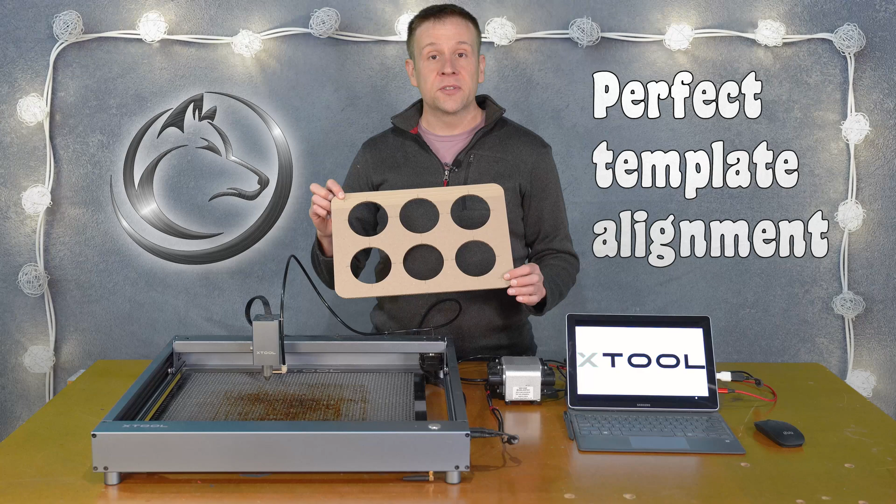I'm your host Greg, and in this episode I'm going to be making this template with 2 mini alignment crosshairs to reuse this template in future use. I'll show you how to make this template and how to align it to your workspace in your laser machine. Stay tuned to find out how.

For this project, to make this template, I'll need the following materials. Starting with the obvious and basic one is a piece of cardboard or plywood. I prefer cardboard because I'm not sure how many times I'll need to use this template in the future.

The last items are some type of measuring device if you're working on your own template. For mine, I'm making templates for these wooden cutoffs from a tree branch used as finisher medals for a local event. I have those sized to fit through here, but your project material might be sized slightly different. The last thing I'll need is a pair of safety glasses for this project.

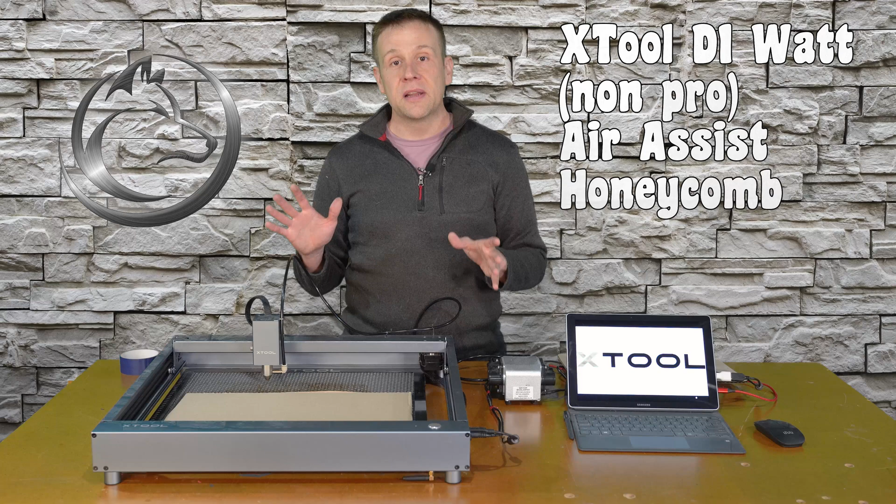The machine and tooling I'm using is the Xtool D1 10-watt laser machine. This is the non-pro machine, so it does not have limit switches, but with the software updates for the machine and in LightBurn, it does have a homing sequence, and we will need to use that during this project.

The other thing I have is the Air Assist Kit, to burn cleanly and deeply through this cardboard. The last item I'm using is this honeycomb. It is magnetic and has a backer board sheet metal behind it, so any stray laser beams going through the project material and honeycomb won't mark up my table.

There's just a few steps to make this template that we can reuse and realign for future use. Join me as I go into LightBurn and design out this simple template.

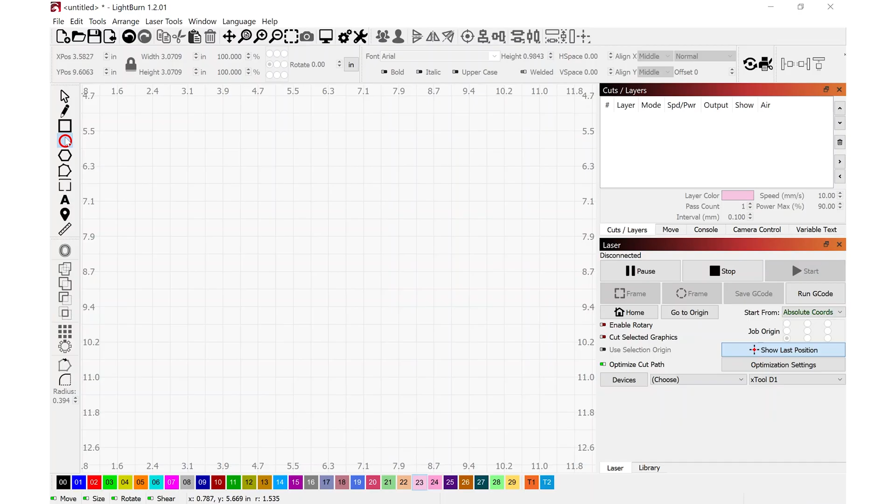I'm going to select the circle command and select layer 9, which is something that will show up much easier. Hold the shift key to make it stay a perfect circle. For my medallions, I need a diameter of 3.2 inches. If you're following along at home on your own project, you might need a different diameter.

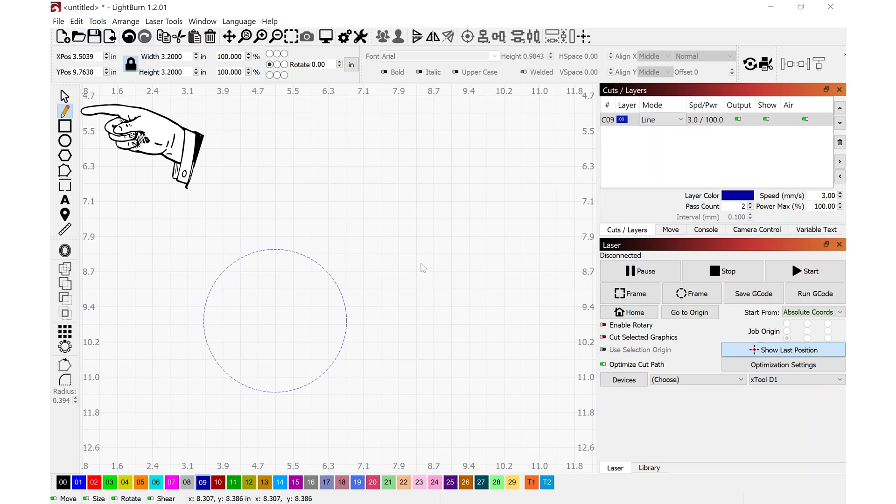Select the pen tool and draw a crosshairs vertically through the circle. This gives me an idea of the sizing, and I'm holding down shift so that this line will go in 45-degree increments. I'm going to pull this off to the side and select layer 10.

I'm going to Control-C to copy, Control-V to paste that. I'm going to grab that, move it back where you can see it, and while that's still selected, rotate it 90 degrees. Grabbing somewhere around the middle here, I'm going to move this around till I think it's somewhere in the center to make this crosshairs.

You'll see that my mouse pointer changes between a cursor and a smaller crosshair. That means this is centered up. There, this looks like it's centered up.

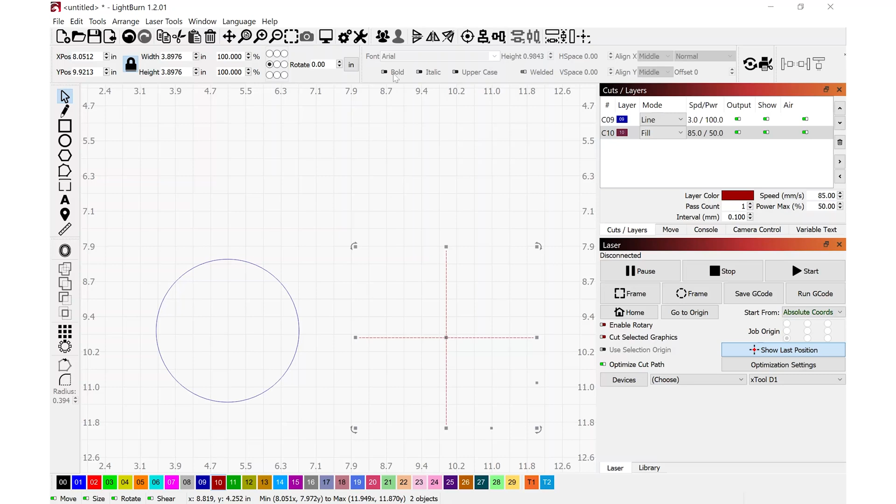With the horizontal and vertical crosshairs selected, I go up to the top and do group select. That will form this as one group, and I'm going to drag this over back to the center again until my cursor turns into a crosshair. Now I know that the crosshair I just drew is perfectly aligned to the center of the circle.

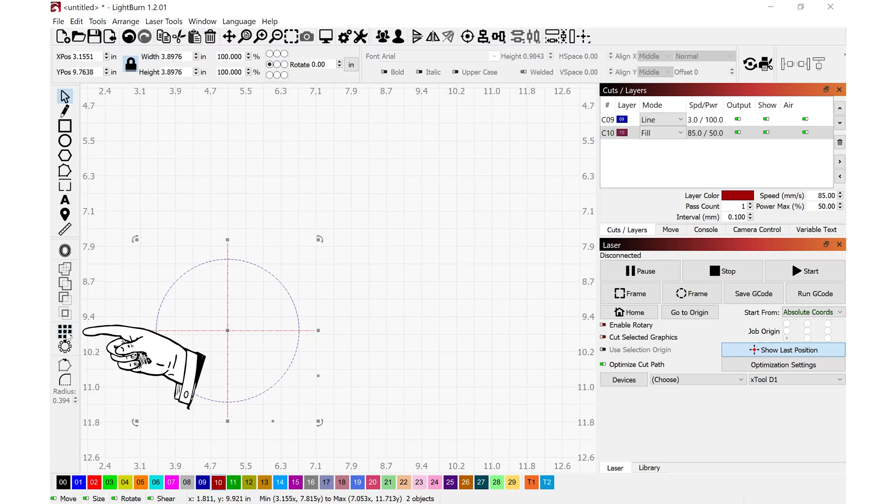Now selecting everything, I'm going to go over to this icon here, create an array of the selected objects. This is the easiest way to duplicate and make a neat and orderly pattern for our template. The X columns, I'd like to make that 3 wide and 2 rows tall, and in between, I'd like the spacing to be 1/4 inch for both X and Y.

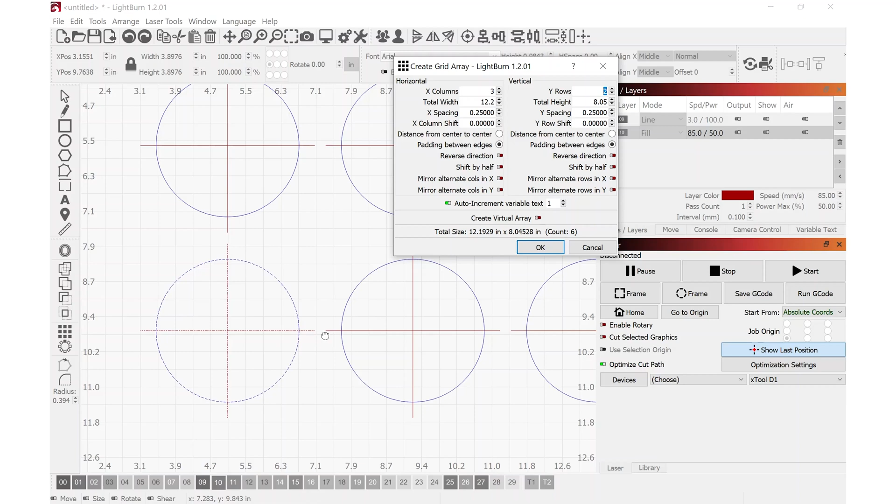Now it's setting that spacing off of the very furthest point of each object. In this case, it's the very tips of the crosshairs that we drew. I like the way this looks. Let me zoom back.

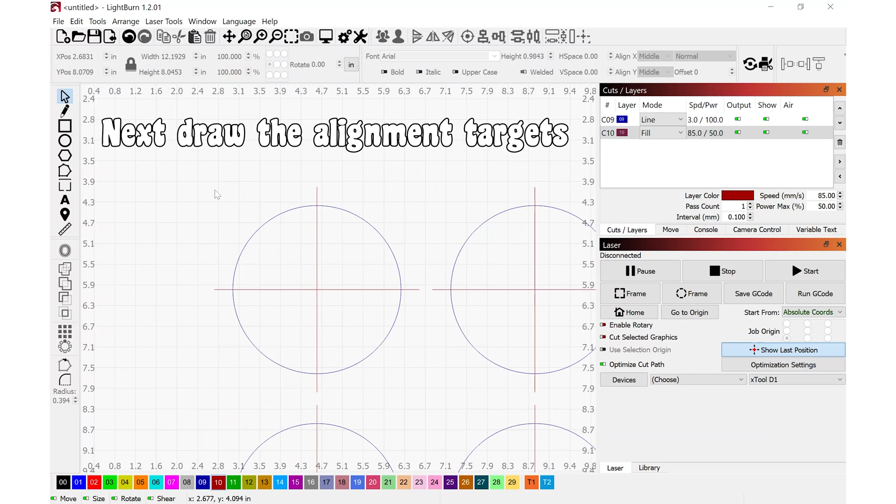Holding the space bar, I'm going to pan around on the screen. I'm going to zoom in and select everything, and move this a little closer to the center of the work area. Next up, I'll zoom in by one of the corners here, select the pen tool once again, and we're going to draw these smaller crosshairs.

And the smaller crosshair, I'd like to make that a half inch long. I'll Control C to copy and Control V to paste that while it's still selected, rotate 90 degrees, grab the middle of this and move that up until it turns into a crosshairs. Again, I'll select both pieces and group those together.

And with that selected, I can copy and paste that. And I'm going to grab this one. Typically, we put these alignment crosshairs in opposite corners.

The further away these crosshairs are from one another, the better the alignment will turn out. For example, if I put this other crosshairs right here, any slight misalignment I have here, the further I move away from that, it will be amplified. So a small error over here will be a very large error over here. Now if I have the crosshair alignment all the way to the opposite end, any small error over here will be even less in the middle.

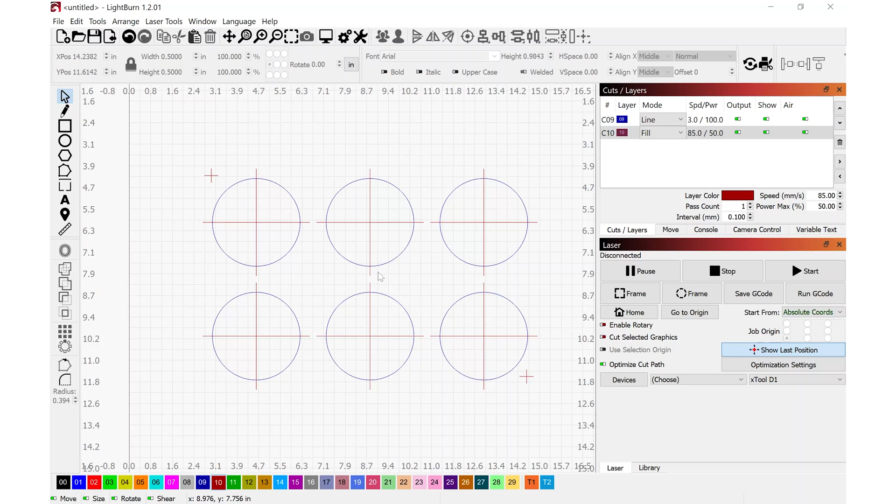And for the last step, I'm going to draw a box. I'm going to use a different layer for this one, and I'm going to draw something like that. And I'm going to hit the escape key twice to go back to my cursor. And with the box highlighted, I'm going to drag that around until I'm about in the center.

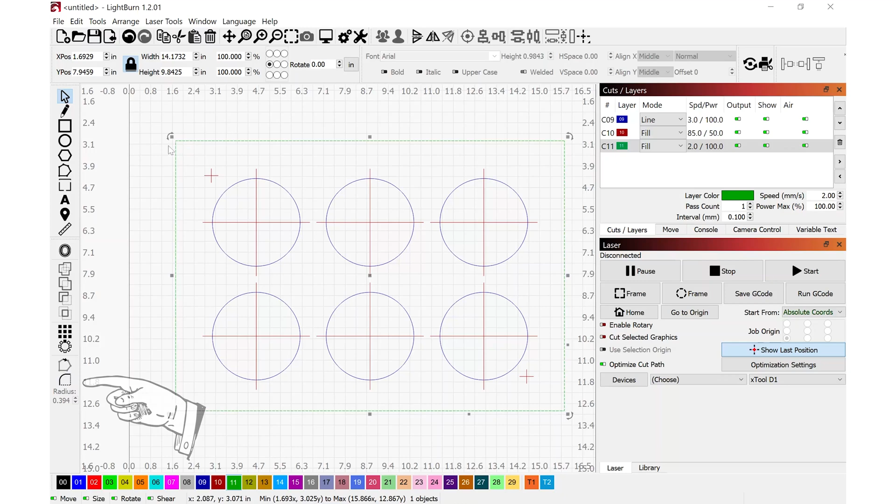And that looks good. And down here, I'm going to click the radius because for my templates, I don't want to have these sharp, pointy corners on it. I want to make it look nice with some rounded corners. I'll go down here and click on that tool, and I'm going to enter a 1-inch radius.

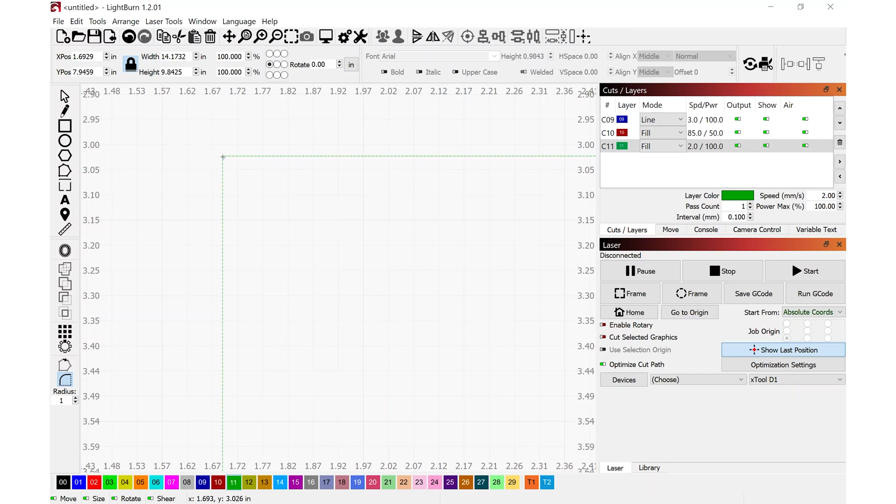I'm going to zoom in on the first corner because it can be hard to see. When I move my mouse cursor over that corner, you'll see it change to a crosshairs. That means that this radius tool will work. So when I click on that, there's our first corner. And I'll go around and hit each of these other corners.

Takes a little bit of mouse control just to get your mouse pointer in just the right spot. If you find that you still have this white arrow mouse cursor, you're not in the correct spot. It does need to change over to this little mini crosshairs.

That looks good. And just to review, my layer that is 09 is cutting out the circles. And then the next layer, I'm going to change that to line - that's making the crosshairs. And the last line, let me change that over, is actually cutting everything out. So the crosshairs on both the large circles and our alignment crosshairs are the same layer, and that's okay. And this all looks good.

I'm going to type in some settings. I did some tests with this cardboard off camera to know what works best. For cutting lines, a speed of 10 millimeters per second at 100% power was very good. When I go over to engraving the material, a speed of 85 millimeters per second at a power level of 90 is perfect. And again, for this line on cutting out the entire template, we'll go back to 10 millimeters per second at a power level of 100.

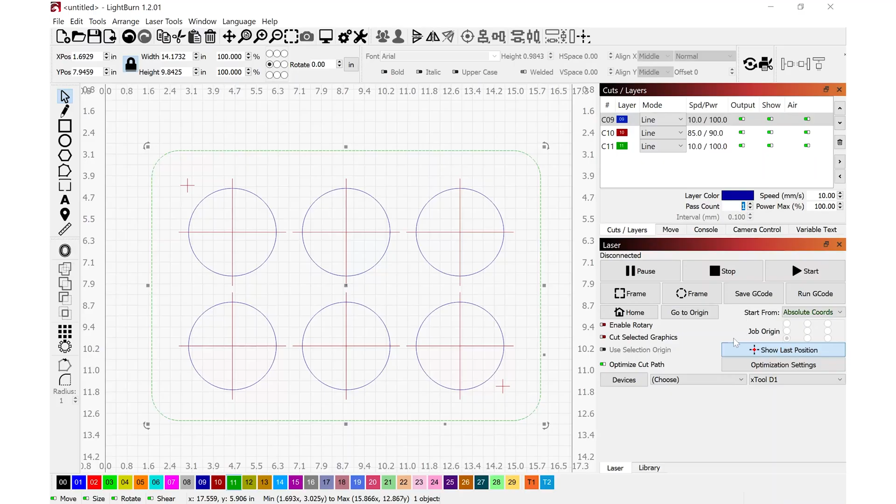With all of our template drawing made, it's time to turn on the laser machine. I've got under devices, Xtool is selected. I'm going to choose the COM port. And I'll click on the console tab and see that it is connected. It does identify it as an Xtool.

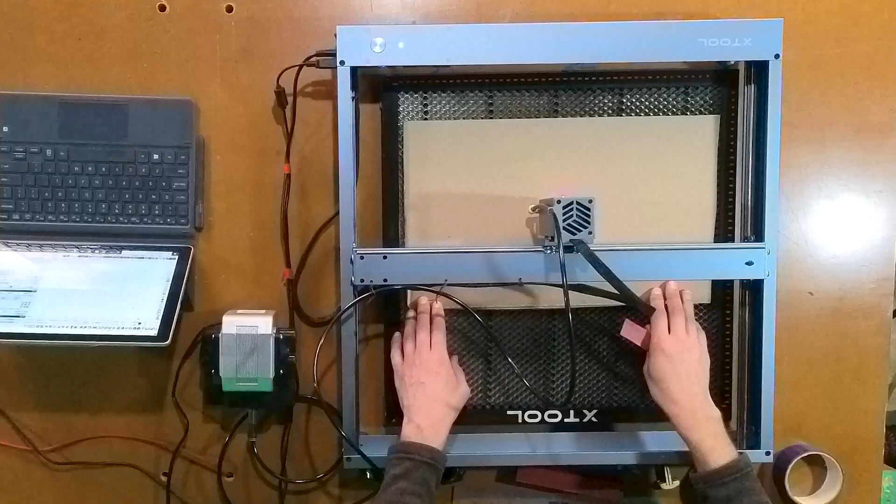With my material in the work area, I'm going to just put some of my magnetic strips around just to kind of captivate this cardboard to make sure that it does not shift around during the engraving process. Normally I don't have work that moves around on me, but when running Air Assist, if I do have a lighter type material, that can cause the work material to flutter around and then gives odd results, making it look like there's a machine tool problem when actually it was just the work floating around during the engraving process.

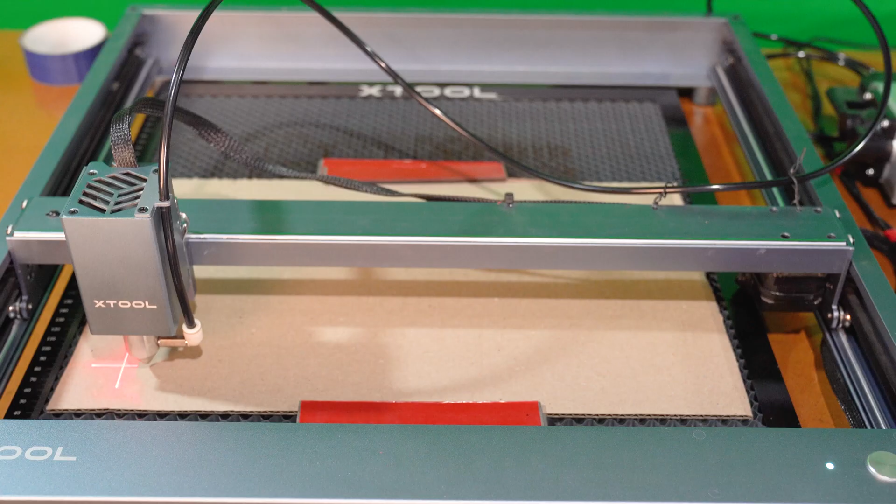And we'll see in the computer I have the start from option under current position. This is what I use when I manually push my laser machine to where I want it to start. I'm going to click the frame button and make sure that the laser travels over the entire workpiece.

With the framing complete, I'm going to turn on the Air Assist. I have a box fan on and the door open to the shop. Normally I have an enclosure that's over here, but I do like to show the setup without any enclosures blocking the way. The other thing that I'm going to do is put on my safety goggles, and going through our pre-start list, I've set the focus, the work has been secured, and we did frame everything out, and the laser travels over the workpiece, and the laser module itself doesn't collide with any clamps or materials in the work area.

This template took just a few minutes to design in LightBurn and about 5 minutes to cut out. This little bit of time that we spent on this is going to save us so much time in the future when we can batch out 6 or 9 or however many you make on your template.

Now, the first thing I always like to do before I remove any workpiece off of the workbed is go in with a small screwdriver or a pick and just kind of probe around and make sure that all of the cutouts that are supposed to be cut out are in fact loose.

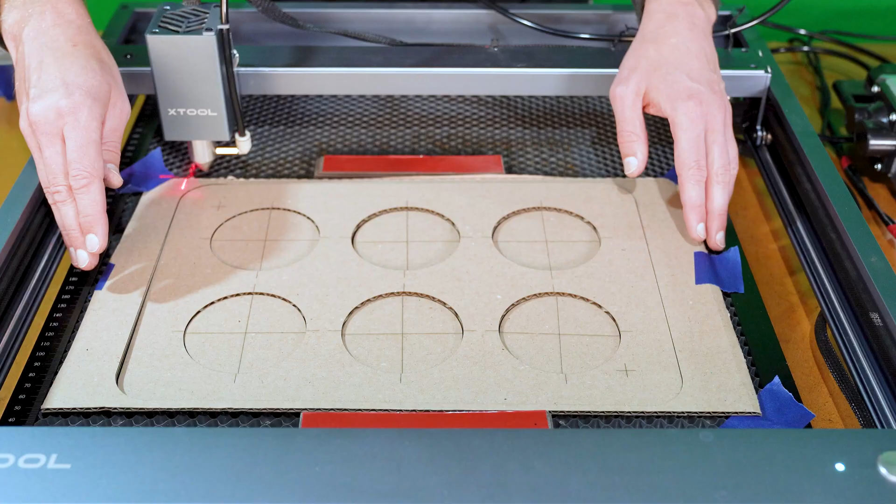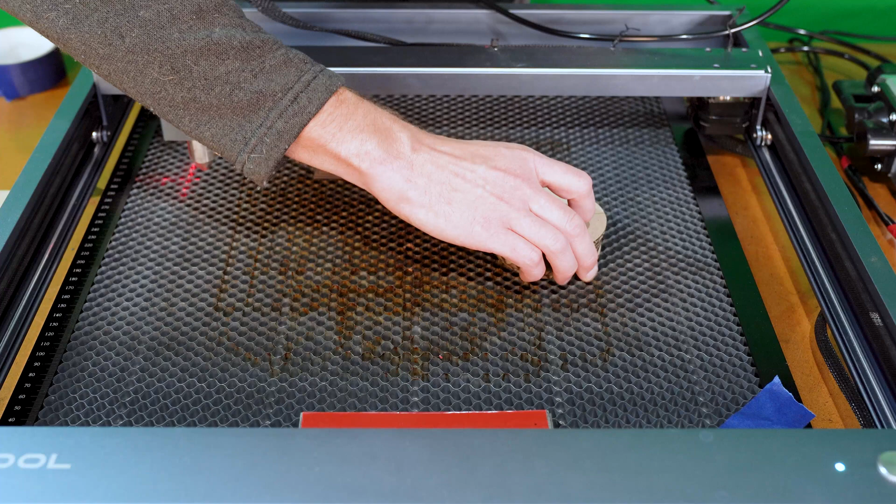Knowing that all the pieces cut out cleanly, I'll remove all the pieces from the work area, mainly our work template. I'm going to hang on to these because I'm going to show them in an upcoming step. I'm going to actually engrave some pretend medallions on the back with our template aligned in the work area.

Instead of trying to make it look like it's been put in there perfectly straight, we're actually going to throw this in at a slight angle and make sure that everything comes out correct so that what's drawn on our screen matches in the tool bed area.

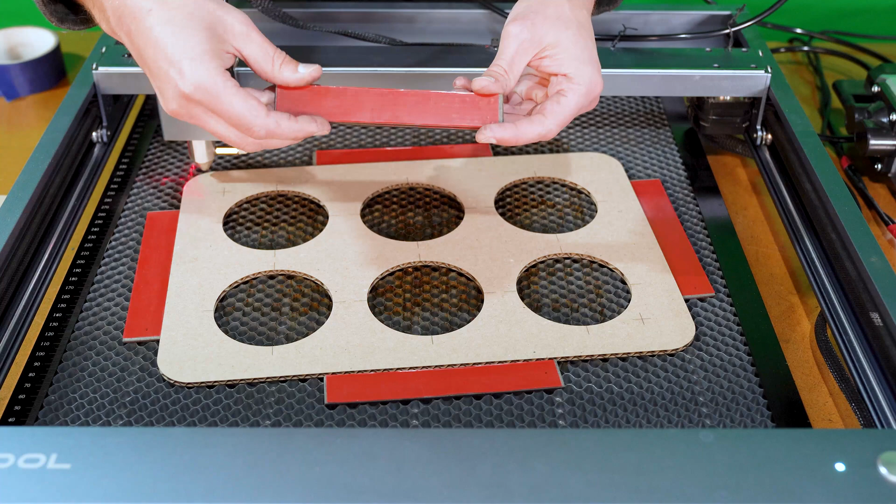For this, I'm going to tilt this so it's very obvious I did not put this in straight, and I'm going to use the magnets to box these in. That's one of the great things about having a honeycomb that is magnetic - I can keep reusing these magnets over and over again without having to peel tape each time to secure a project down.

Jumping back into LightBurn, the first thing that I'll do is change the start from option from current position to absolute coordinates. This really neat alignment feature that we use, as far as I know, only works in absolute coordinates. And the next step is to home.

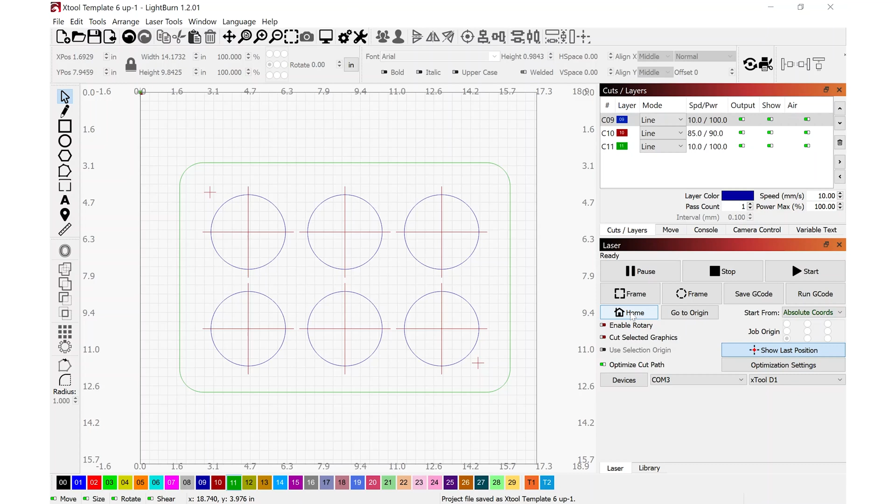Now, you've got an Xtool D1 - it doesn't have homing switches, but there is a feature that Xtool added that in the industry I worked in, we called it a hard stop homing. What it does is it actually takes the tooling, in our case the gantry and the laser head, and it just moves it until it hits a hard stop.

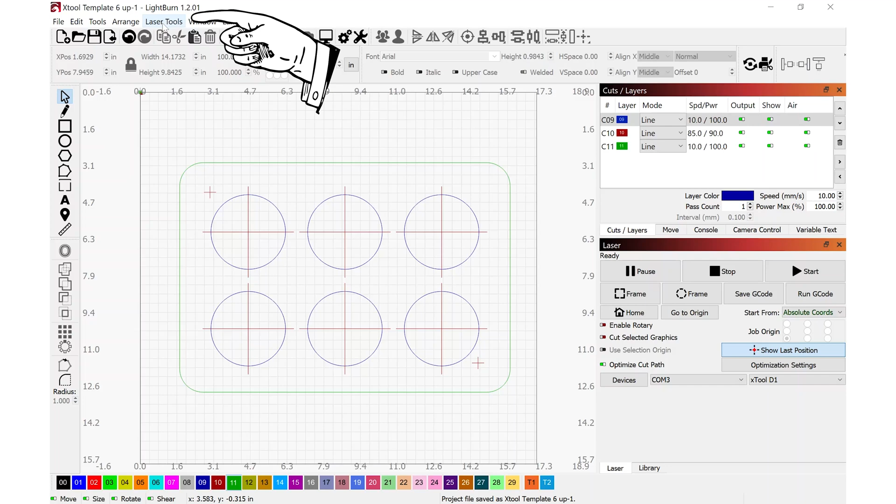With the laser homed, of course, in absolute coordinates, the secret tool that we want to use is located under Laser Tools and Print and Cut. It's this Print and Cut feature that we really want to use. I'm going to just start the wizard - it's the easiest way to go.

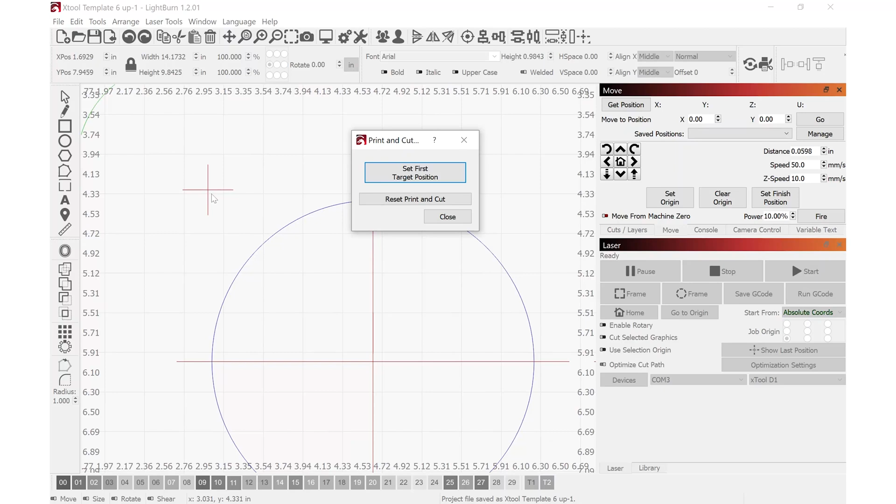I'm going to grab this top corner one first, and the first thing I need to do is zoom in a little bit so you can see it better. My mouse cursor is going to move to a crosshairs, it's going to select this entity, this crosshair that we drew earlier, and when I tell it to set first target position, by selecting this, it's going to correlate those two things together.

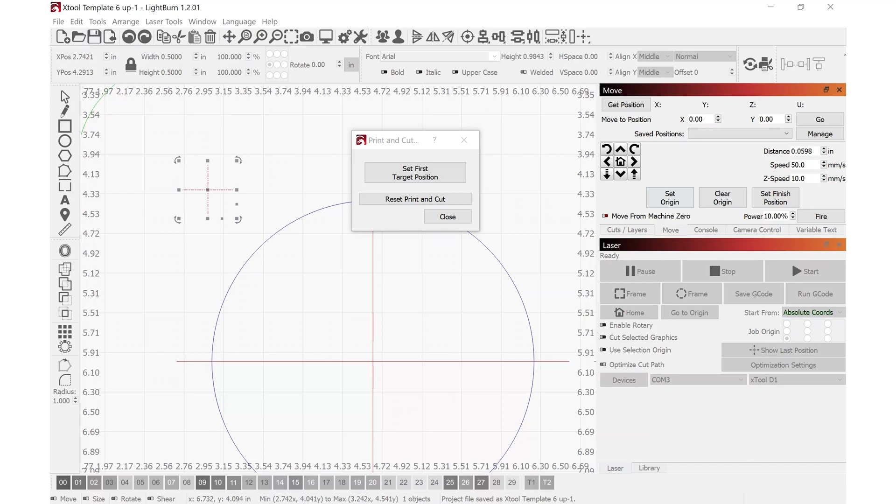So I navigated over to the Move tab, and I'm going to change my move distance to a couple of inches here. This does take a little bit of time and patience to manually move the laser over. You can't push your laser - if you push your laser by hand, it'll lose track of its position and you'll need to rehome your laser and start this process over again. So no hands on the laser.

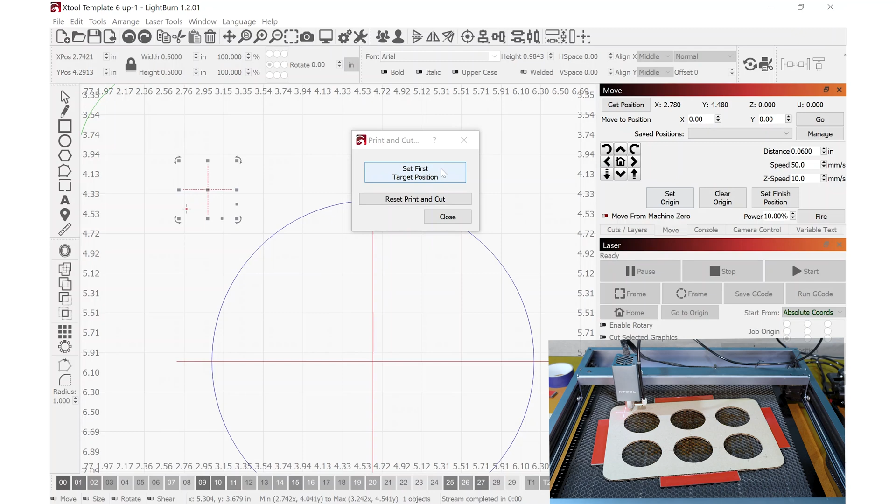Keep making these measurements smaller and smaller. I'm going to go through this rather quickly just for the video process - the better this is aligned, the better your results will be. I'm going to nudge this over just one more, and that looks pretty good. I'm going to select Set First Target Position, and you'll see that it drew a red circle around, saying that it did in fact find that correctly.

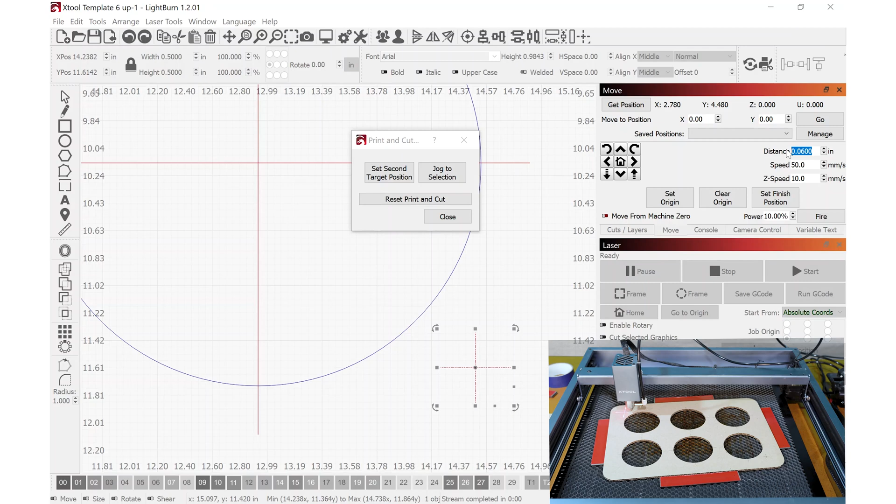Now I'm going to select this bottom one here. Again, I'll zoom in for you, and my cursor turns into that crosshair again, and it selects that. It's just a matter of jogging the laser head over to that area. I've got my crosshairs pretty well centered up over our target, and I'll select Set Second Target Position. You'll see that it drew another circle around that, saying it successfully found that. So we've got a red circle and a blue circle.

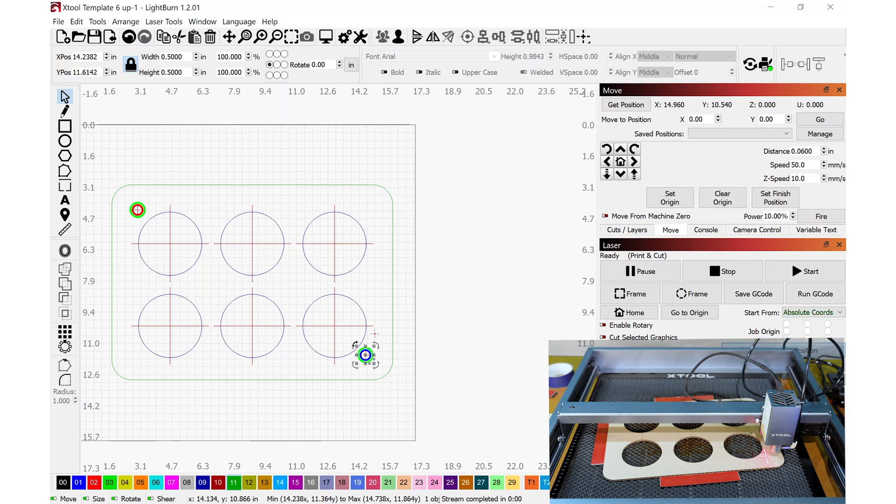There's one last step, align outputs, scaled. It has that highlighted as default - I haven't played with these too much in between, I always just do the default one. Let me know in the comments down below if you found a need to click on the no scaling option here. Once I click on this, I get a green circle around saying that this wizard has successfully completed.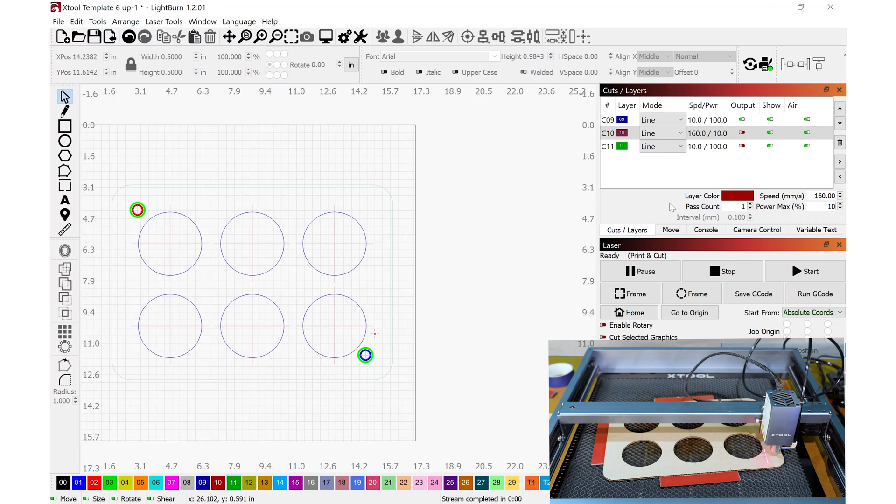So to test this out, I'll navigate to Cuts and Layers, and I want to check out these circles. That circle is on the first layer, so I'm going to turn off these other layers, and I'm going to adjust the speed to say 160 and maybe a power of 10. I just want to see that the laser beam is on - I don't need to actually cut. I'll hit start and we'll see how well this traces out over each of the circles.

And that's cutting out pretty good. It's just kissing the edge more towards the left, and the rest looks pretty good. Given the amount of time I spent aligning everything, I think that's really good. And given the medallions I'm using, there's quite a bit of wiggle room when I place that in, so the fact that my alignment is off one or two millimeters, more like one millimeter, is perfectly fine for me.

For this next step, I'm going to use the cutouts from before and put those, maybe one right here and one up in this corner here. I know you can't see it from the computer, but it's up in that corner. And maybe we'll do one down here, so we've got one, two in a row and one in the opposite corner.

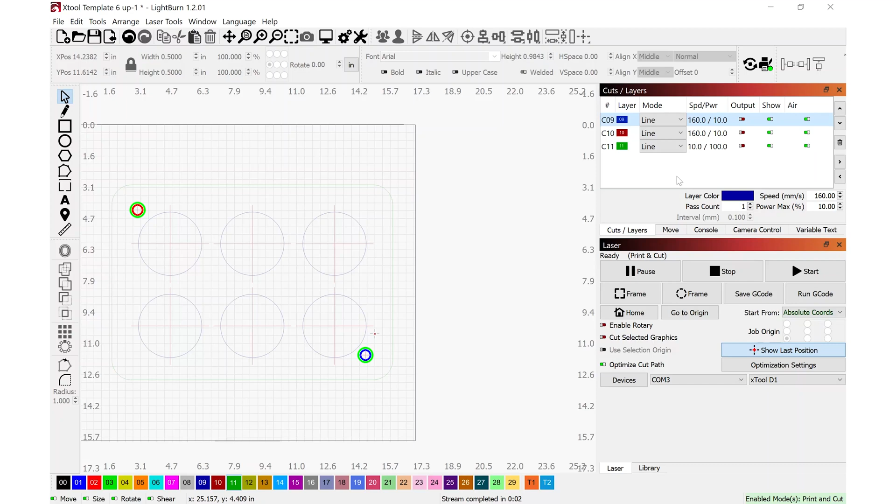To use the template now, what I do is turn off all the outputs for that. So anything new that I add in here, like a design, will be as a new layer.

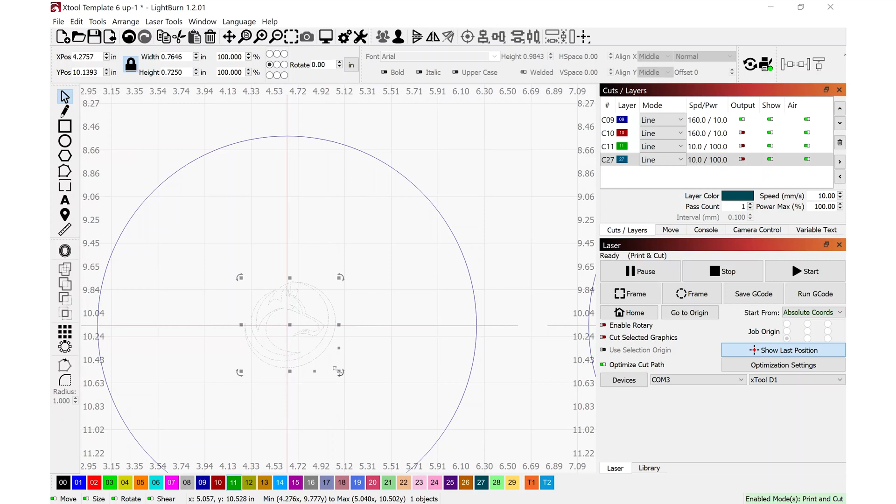Okay, I've imported a file that I have. Here's the important part, I've got to drag that over to here. Again, the crosshair, my cursor, turned into crosshairs identifying the center of the circle. Let me zoom in a little bit more, and I'm going to just drag this corner and make this a little bit larger.

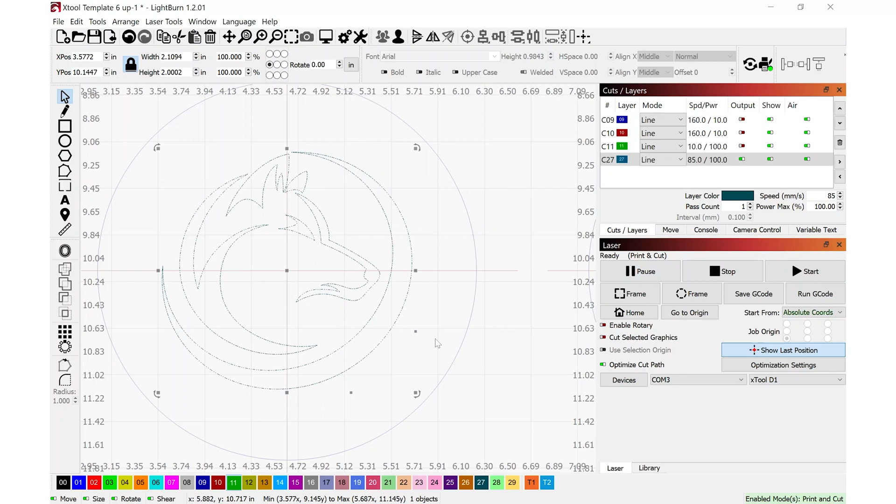And I put this right in the middle, and when I brought that in, it brought in a new layer. I'm going to turn that layer on, and this layer is a line. I just want to draw it as a line so it cuts, and I'm going to use it as engraving, so it does that very quickly. We had that at a speed of 85 millimeters at a power of 100 — those are my settings with my laser for the type of cardboard I'm using.

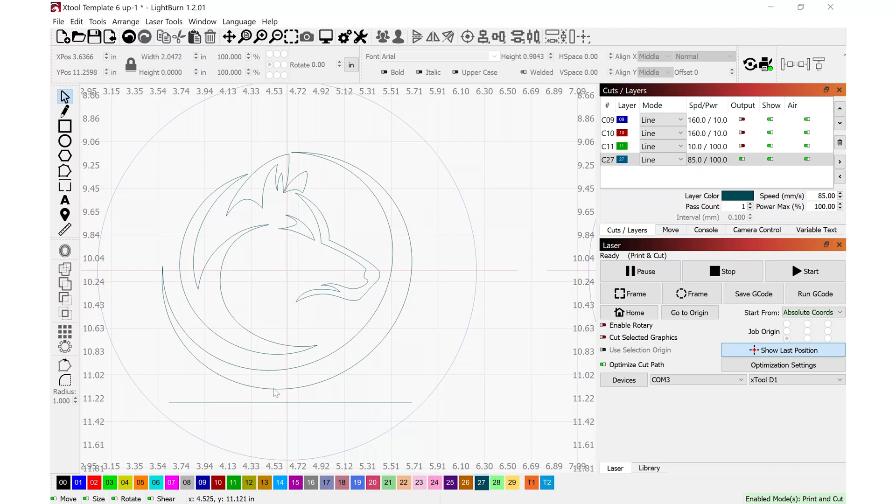I just want to draw a line down here, so I click once, hold shift, bring that line over, and then escape. Escape again to go back to my mouse cursor. I'm going to move that line down and put it on layer 27 so it matches this wolf head. The reason I'm bringing that line in is because I want to make sure it ends up being parallel to this line down here, since I have the template in at kind of an angle.

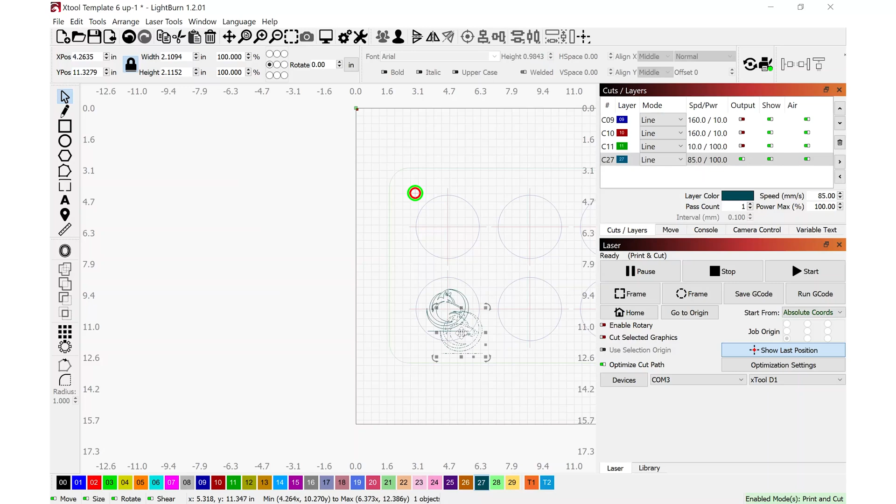My next step is I'm going to select both of these, group them together, and copy and paste that one. I'll do that one more time. Certainly if I was filling in my entire template, I could go back to this first artwork image and do an array of that, and it could pop that in automatically. But for this, I'm just going to do it this way because it's quick and easy.

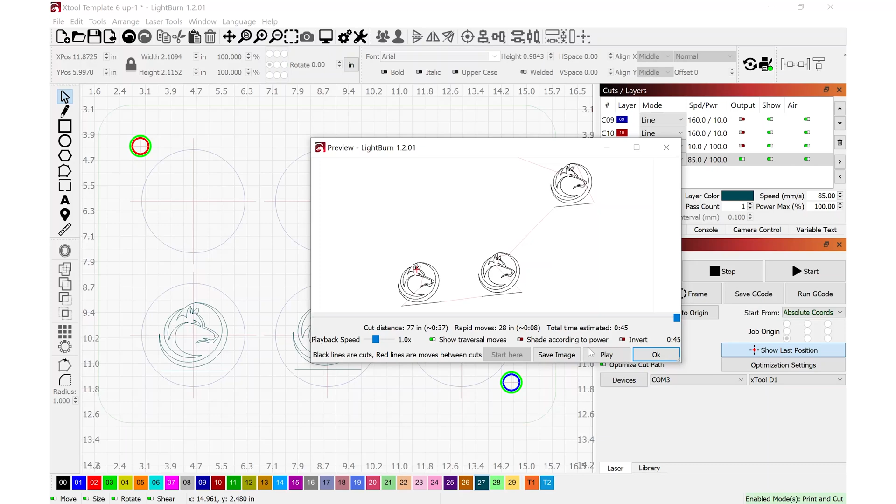A lot of times before I hit start, I like to come up here to the preview and look at the total estimated time for the job — 45 seconds. That's the benefit of drawing out this design as a line rather than a full engraving. If I did this as an engraving, it would be like 5 to 8 minutes. As a line, it'll do it under a minute.

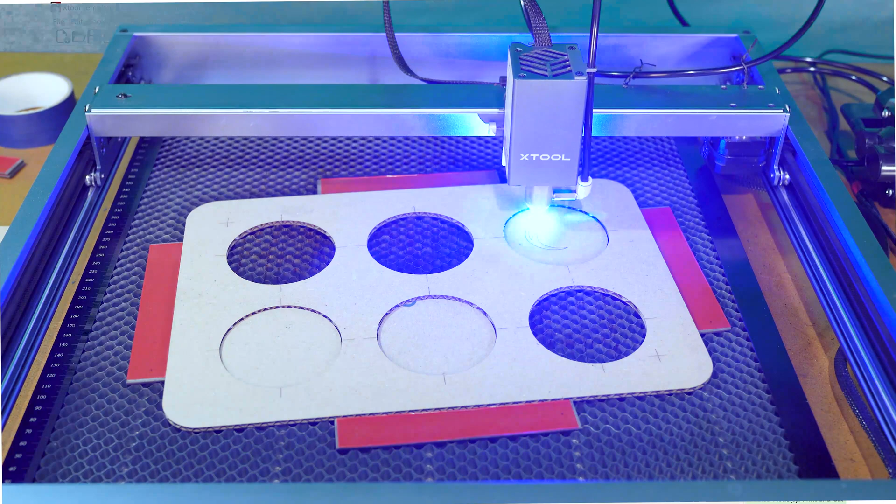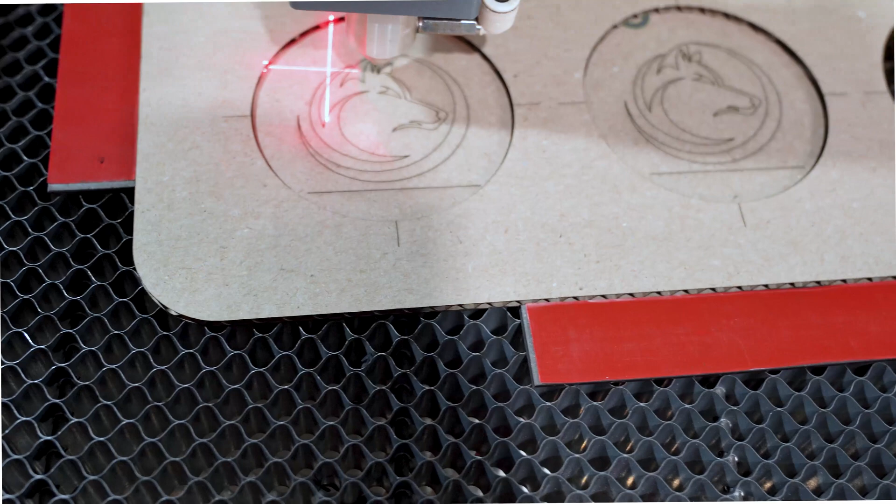Perfect. And without touching anything, I'm going to check the alignment here, and it does look like from the bottom of the template to this line that they are in fact parallel to one another.

So that is pretty neat. With the template skewed pretty far in the workspace, we used that print and cut design to compensate for that. Wow, I'm really impressed with this print and cut feature in LightBurn. It really makes quick work of setting up templates to use for projects and future projects. I never realized that I could have this template turned that far in the workbed area and still have all of the shapes take that same tilt and come out perfect.

I had a lot of fun making this video, and I'm really happy to share this information with you.